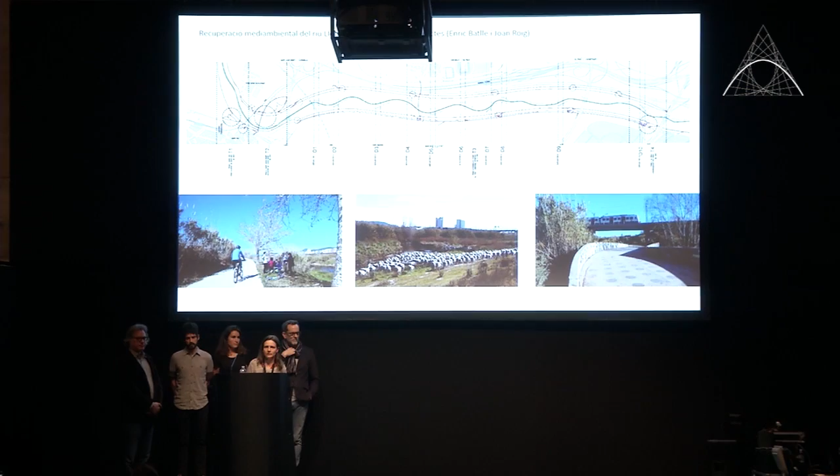This is a river next to Barcelona, in the Barcelona metropolitan area, and it is a project that connects 6 municipalities. It also improves the quality of the river, but it creates a big green corridor that connects these small towns and gives them pedestrian and bicycle access to the sea.

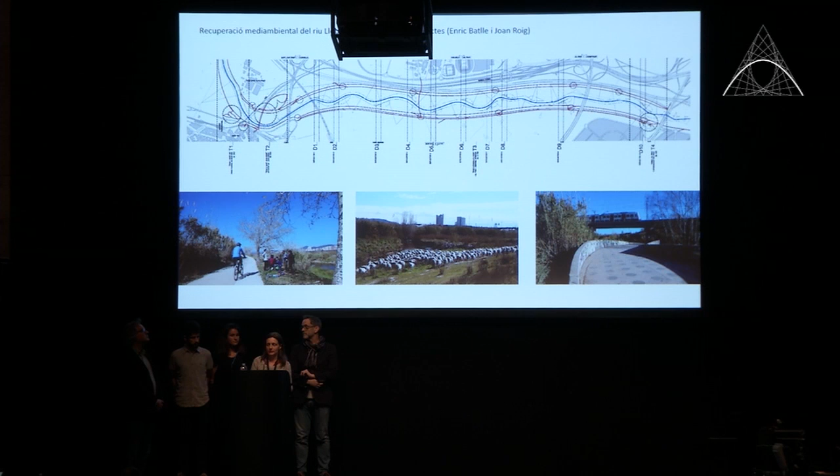All the buildings and interventions we selected are very respectful of their context — social, natural, and urban — and connect to it. This is a transfrontier hospital being built between Catalonia and France. It not only connects two countries and two health systems, but the building itself as a form includes the scenery and the mountains inside.

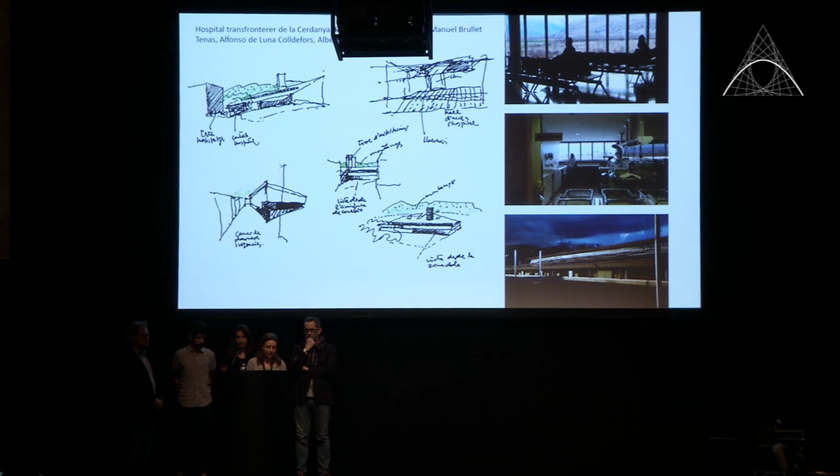There's another one, the Julia Tower. This is a residential block for elderly people, assisted residents, that puts all the corridors and community spaces on the facade. In that way, it connects the cityscape and brings it inside the building.

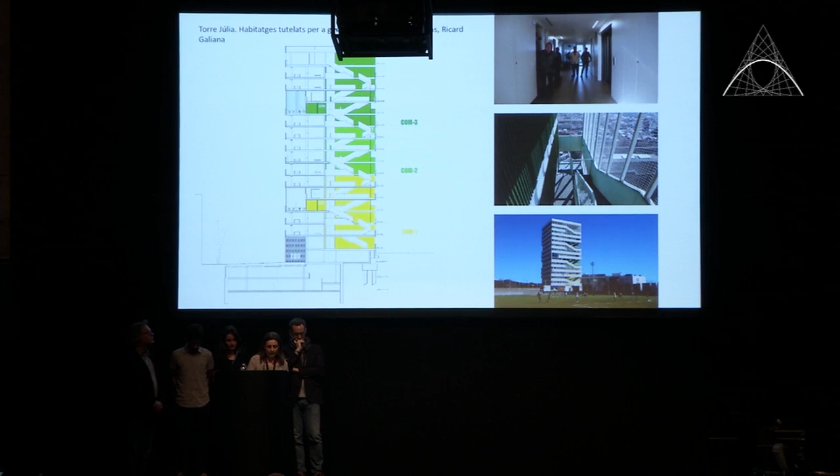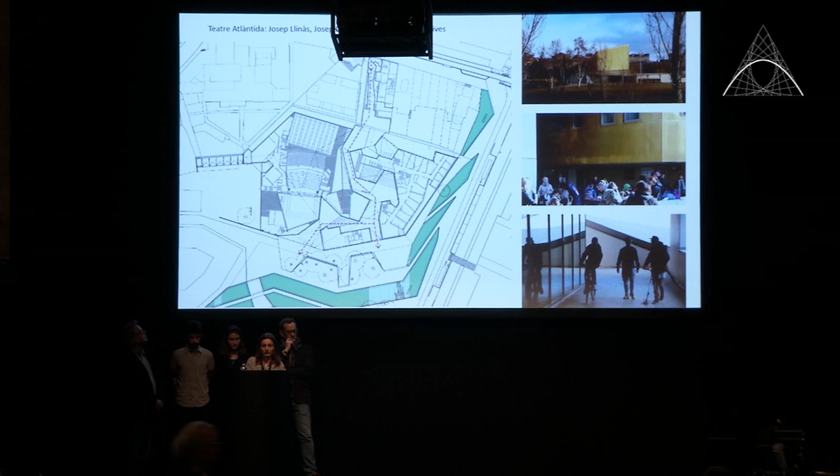The Theater and Music Conservatory in Vic, Atlàntida, is built around a very complex program of three theaters and a music school. What's important in this building is that it's built around a city street, and it's very respectful of the cityscape of the old medieval town of Vic.

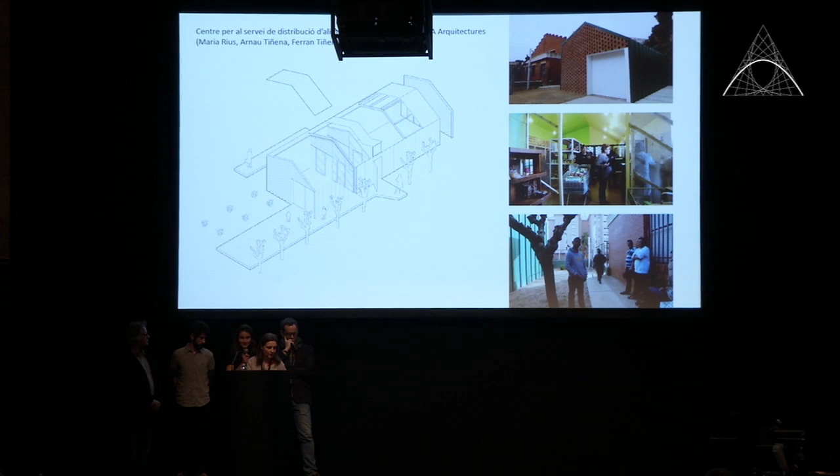There are 2 architects' teams here: NUA Arquitectures, and the project of Archikubik, who will explain it themselves, so I won't be explaining this project.

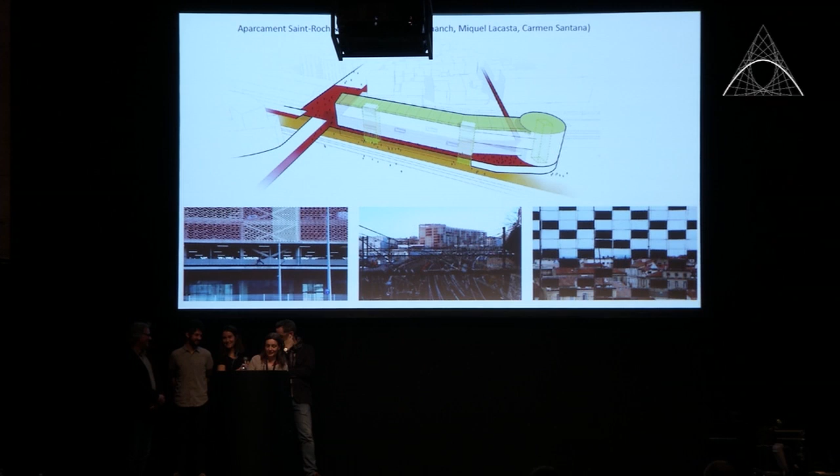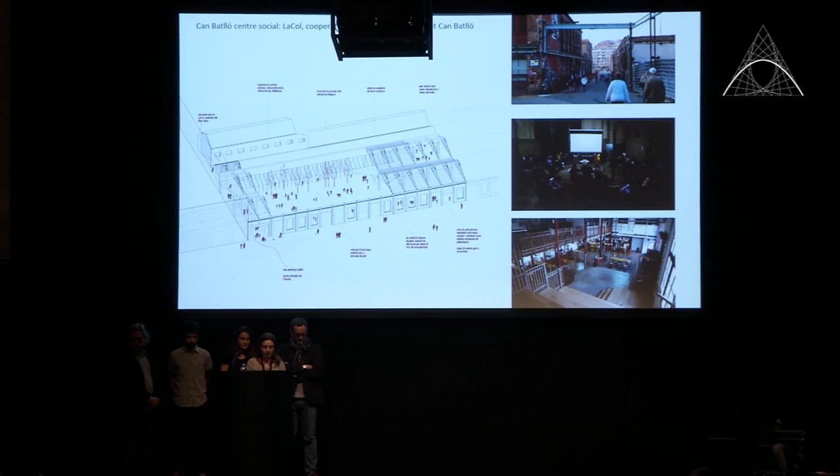The quality that all these buildings share is that they configure a public space for connection and communication, in equal and non-discriminating terms. We understand it as a common good, an added value to the architecture that people like and take care of. We also see it as a legacy of these last 10 years of difficulties in Spain — it's not about the formal thing, but the way people understand and appreciate architecture.

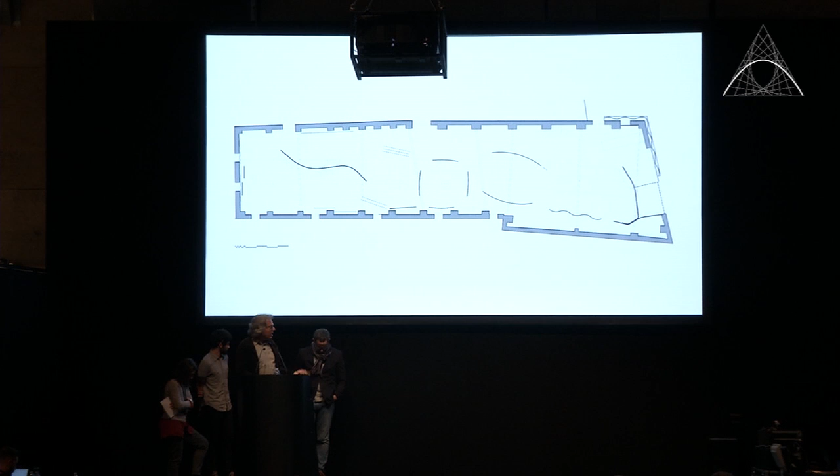So you will have here these huge glasses, these screens, with images floating. This is one of the working views. These are glass screens, curved glass screens, and you will have images floating on the screens as you walk around here. This is how we will show you this.

The facade will be like this. This is a new product developed by this company for us: broken glass mounted in curved glass that will lead you and guide you into the interior of the pavilion to see this.

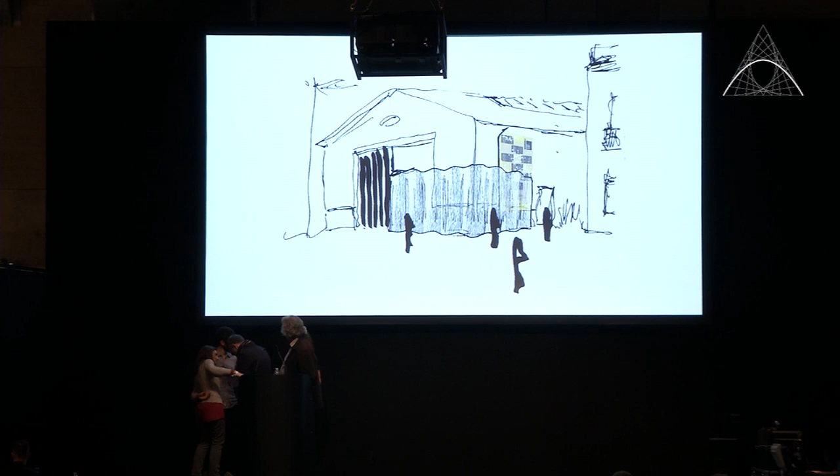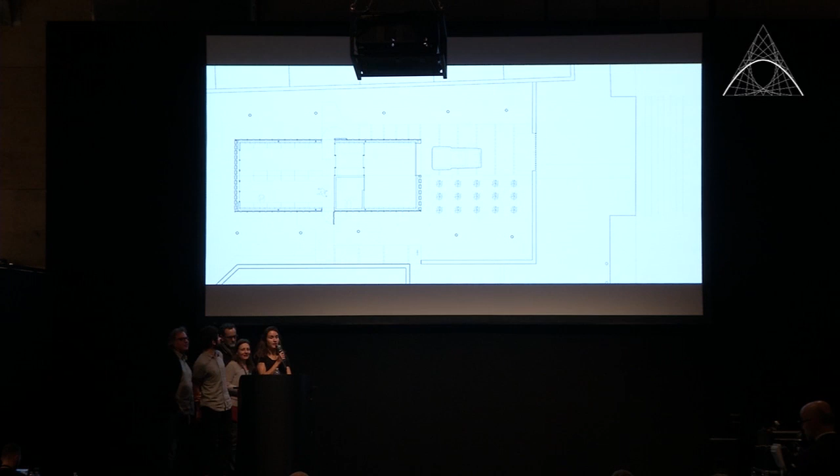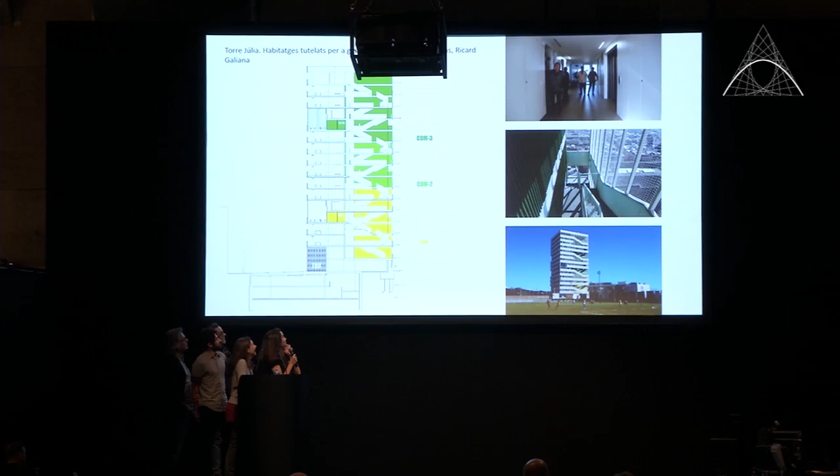We are going to explain the food distribution center. The project we are going to explain is the food distribution center, which is a very small project.

It's only 80 square meters, but it serves over 200 families. It was designed with three strong requirements. The first is the very short period of time for designing and building it: only three months, one and a half months for design and one and a half months for construction. The second requirement was low economic resources, so it was built with only 50,000 euros. The third is the strong security need, because it's located in a marginal neighborhood, so they were really afraid of robberies and so on.

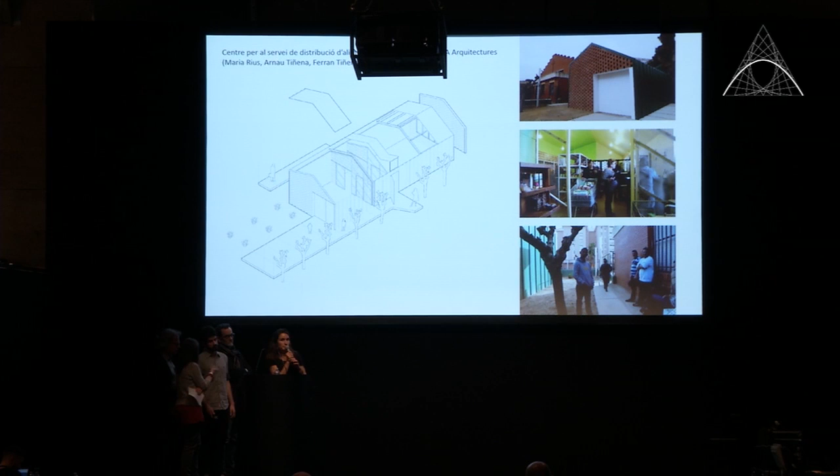That's why the building looks compact, like a bunker when it's closed, but when it opens, it opens not only to people but also to light and ventilation and so on. Here you see the plan; the floor plan is very simple.

It's structured in three spaces. The first would be the distribution space. The second is the service space, which works like a filter between the main distribution space and the third space, which is the storage. This building works more like a trail rather than a space.

People come here and circulate, picking the food they need. We can show the circulation: they get in right here, then they do the circulation, and then they go out here. So we can see that the people cross the building while the food moves the other way around.

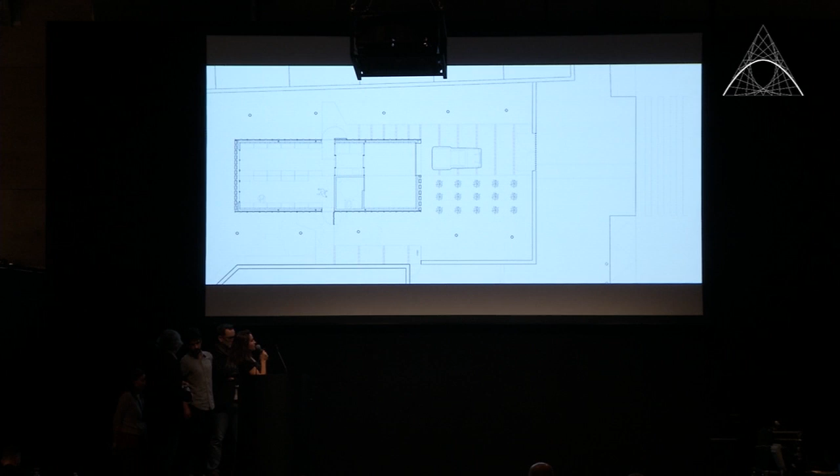And yeah, basically that's it. Another important thing was that the building was finished by 120 volunteers in just one morning, doing the finishes. It was a nice morning, as you can see.

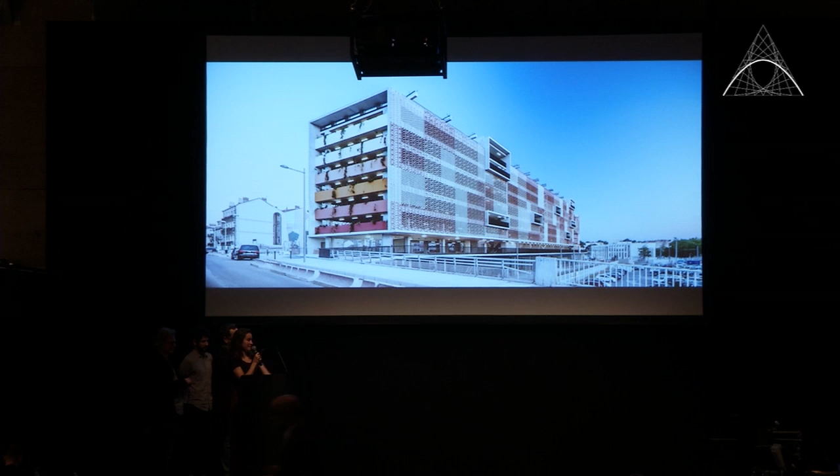And then, Mikel will explain you another building.

Good afternoon, everyone. Thanks to ArchMarathon and Platform for the opportunity to explain very quickly our building. This is a parking for 850 cars, ground floor plus 9, in the middle of Montpellier, related to the train station of the TGV, the high-speed train.

Making such a big building in the middle of the city was a very challenging opportunity, trying to transform the building into an urban device. The building connects one neighborhood that's cut by the rails arriving at the station, and we designed an exterior elevated street. We designed some balconies because there are very interesting views over the city of Montpellier.

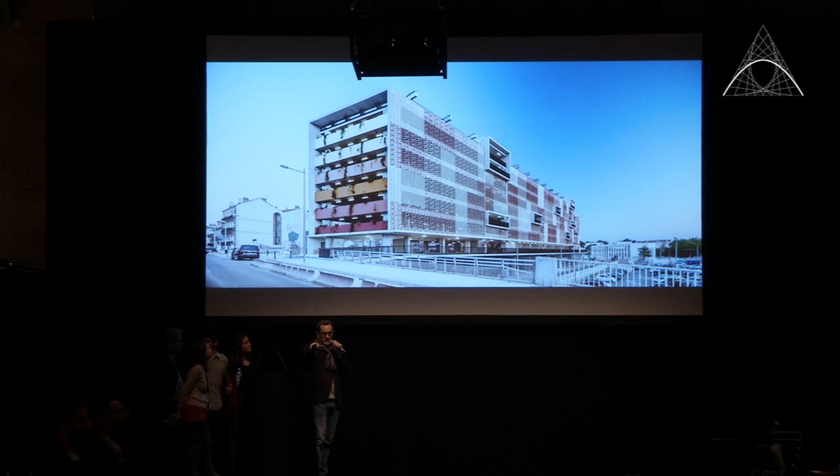Upstairs there is a square where we planted some climbing plants, for in the future making a kind of green roof. So the company that runs the parking business can rent the square upstairs on weekends for young people to make parties or whatever. So finally, it's a building that has a street, a balcony, and a square. This is our strategy to transform the building into an urban device.

The second strategy we designed was that instead of having 2.10 meters high, which is enough to fit the cars, we decided to make it 2.6 meters. That means that in the future, if the high-speed train changes or the cars become smaller or directly disappear, we can transform the building into something else, like dwellings or offices. So the idea of reversibility was there from the beginning of the project, at the beginning of the competition, and it was one of the reasons we won the competition, according to the jury.

The third strategy is the ceramic tile fabric facade, which works exactly like a fabric - it arrives on trucks and the crane lifts it up, one piece that can reach 25 meters long.

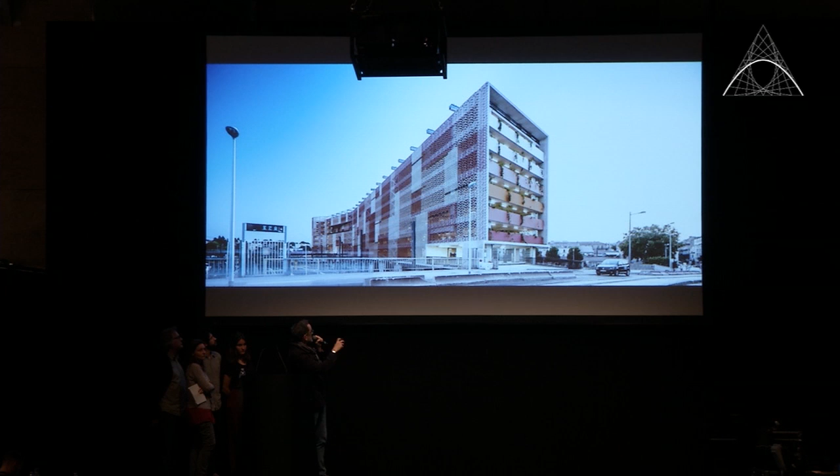We can pixelate and choose the colors. We chose colors very close to those of the city of Montpellier, which is very ceramic - very similar colors - and this allows us to rescale the building to a more human scale, because the building is about 175 meters long. So it's very huge, and our obsession was to try to recover the human scale of the building.

There are also some nice effects, very organoleptic, happening by night and by day, because it has a good orientation. When the sun enters the building, it creates those shadows. During the night, it's the structure of the interior that expresses the idea of the building.

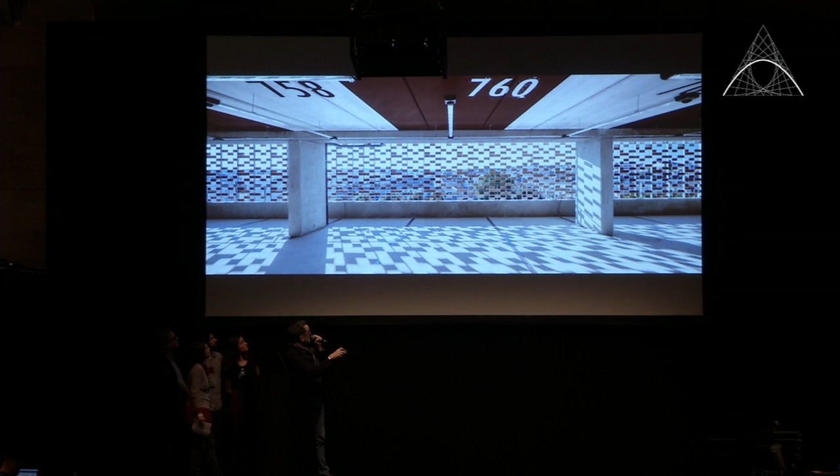Finally, using this kind of open facade, we arrived at more than 50% free space, which means we don't use special conducts for ventilation or artificial ventilation of the parking - just natural ventilation - so we saved a bit of money that we put into those extra 50 centimeters of height per level that we proposed. I think that's the last one. Thank you.

As we explained, in this exhibition, let's stop for a second please, let me explain. In this exhibition, we wanted to question and investigate a little bit about how architecture is usually shown.

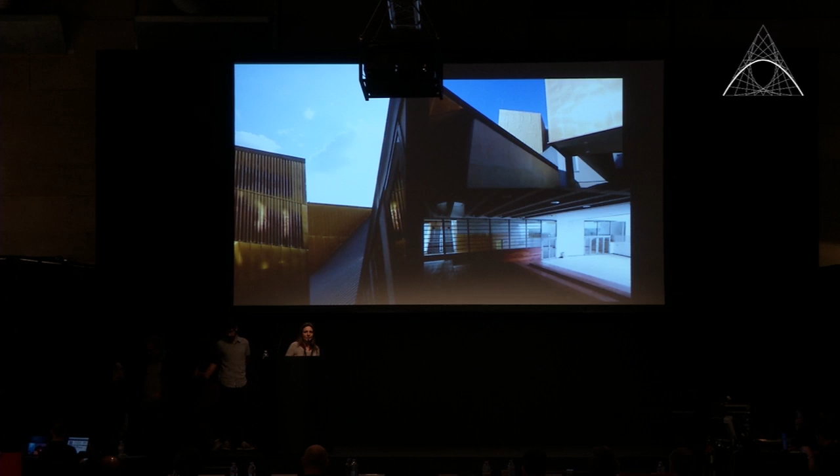We don't actually show much in the way of models, plans, and photos that everyone already knows. We rather wanted to transmit an experience of architecture. So we filmed each and every building, we talked to the users, we also talked to the architects, and the architects have their own space on the internet. So this is kind of cinema - we tried to mix the two media in order to see up to which point architecture can be explained and represented by film.

I would like to invite you to visit our website, where you can see all the interviews we did with architects and also the inhabitants of the buildings and the interventions we show, and to visit our pavilion in Venice. Here's a teaser made by Isaki Lacuesta. Thank you very much.